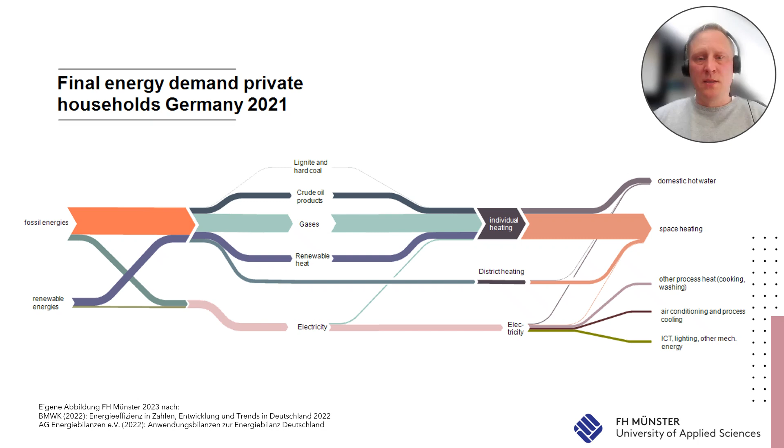But something is changing. For many years now, the heating structure for new residential buildings has been developing in a different direction. Whereas natural gas was the dominant energy source just a few years ago, with a share of well over 50%, in the course of the last few years, and especially in 2022, there has been a clear increase in the use of heat pumps to the disadvantage of natural gas. Within this development, individual solutions are of course depicted, but they also represent the low temperature district heating systems.

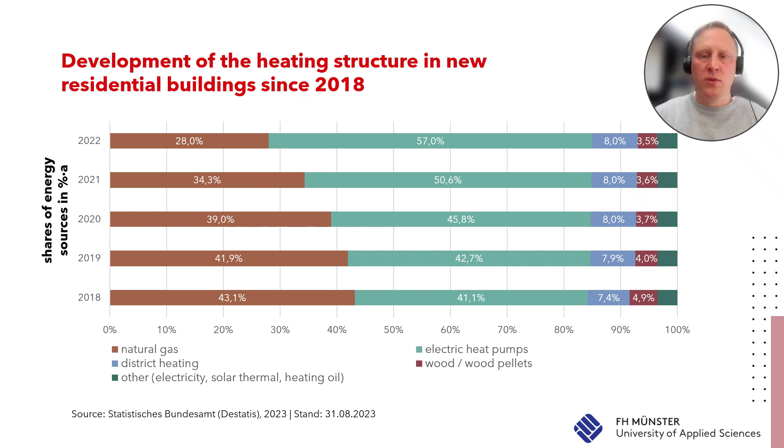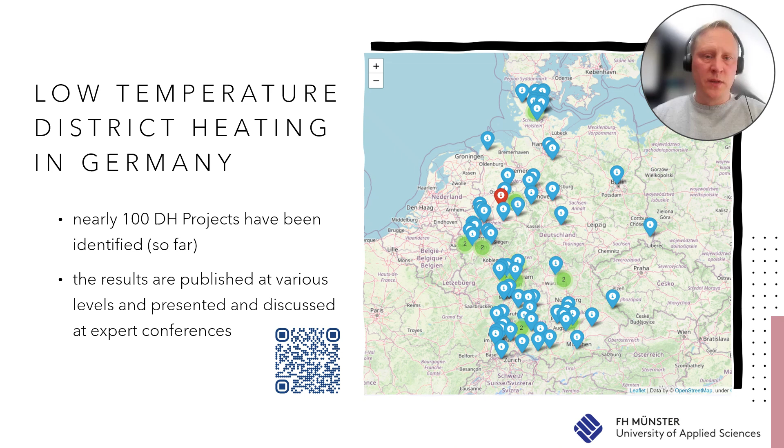More and more utilities and cities are opting for collective solutions, especially in order not to have to give up their customer loyalty. If we look at this map, we see almost 100 low temperature networks in Germany. We created this compilation as part of a funding project in which we are investigating this technology in more detail. I'll talk about that in more depth in a minute.

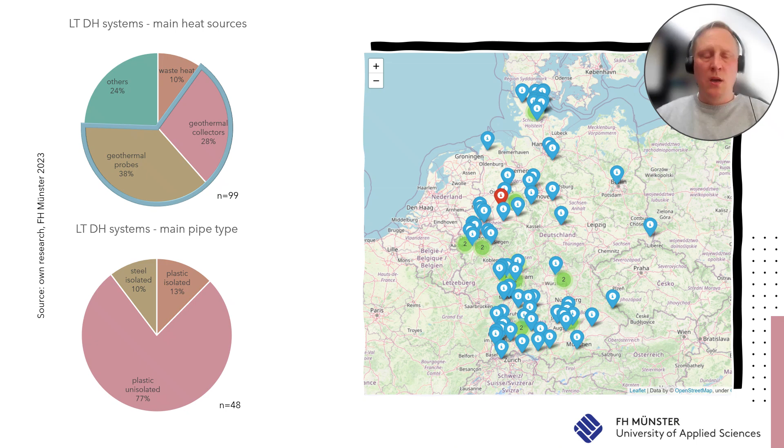The heat source, geothermal energy either obtained via collectors or probes, clearly dominates. On the grid side, this means low flow temperatures. For the end customer, this means a heat pump. In turn, 3/4 of the networks are made of uninsulated plastic. This is also a sign of the low flow temperature, but also of the fact that the ground along the heating network trenches is also used as a heat source. We are therefore no longer talking about heat losses, but about heat gains.

Here you can see the town of Warendorf. The town has a population of almost 38,000 and is located in the north of NRW. The district heating network, which we will take a closer look at in a moment, extends over 18 hectares and includes more than 200 buildings with up to 500 residential units.

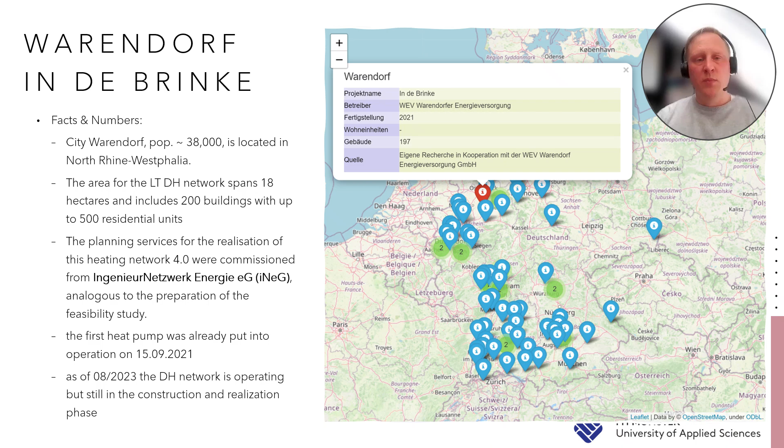The planning services for the realization of this heating network were commissioned from IngenieurNetzwerk Energie eG, iNeG, as well as the feasibility study. The first heat pump was already put into operation in September 2021, and as of August 2023, the district heating network is operating, but still in the construction and realization phase.

In response to the pressing challenges of the heat transition in Germany, as they have been for years and decades, my team already carried out two large Interreg projects from 2016 to 2021 to research alternative heat supply methods. One of these projects led to this particular project in Warendorf.

It all started when the city of Warendorf and its municipal utility decided to no longer supply new housing estates with natural gas. Based on the results of a feasibility study from the aforesaid previous EU-funded project, the construction area In de Brinke became the first test field for this new strategy.

The planning and implementation of the project is funded through the Wärmenetze 4.0 funding program of the Federal Office of Economics and Export Control, BAFA, the predecessor program of the BEW funding you may be aware of. As part of the funding, Stadtwerke Warendorf, in cooperation with us, also applied for funding for the fourth module with the research objective of capacity building, in addition to the funding of planning and construction, and with that task as the only project in Germany.

The task of our research team is to bring the technology of low-temperature district heating networks further into the focus of heat suppliers and thus actively contribute to the reduction of CO2 emissions arising in the heat supply. But let's dive deeper. With the decision to implement a low-temperature district heating network comes a considerable, and for most municipalities, utilities and planners, a new planning complexity.

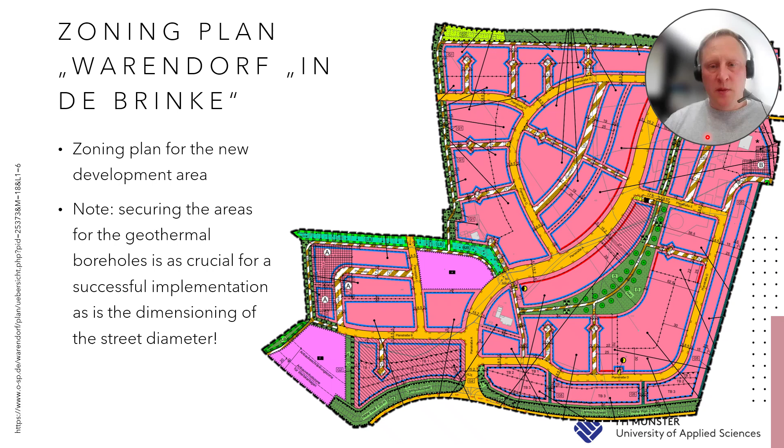Above all, the municipality must take the requirements of the district heating network into account in the development plan. This is mainly done by securing areas for the heating center, the geothermal boreholes, collection and inspection shafts, and of course, the pipelines in the street level. And the city and the politicians have to decide: do I want compulsory connection and use or not?

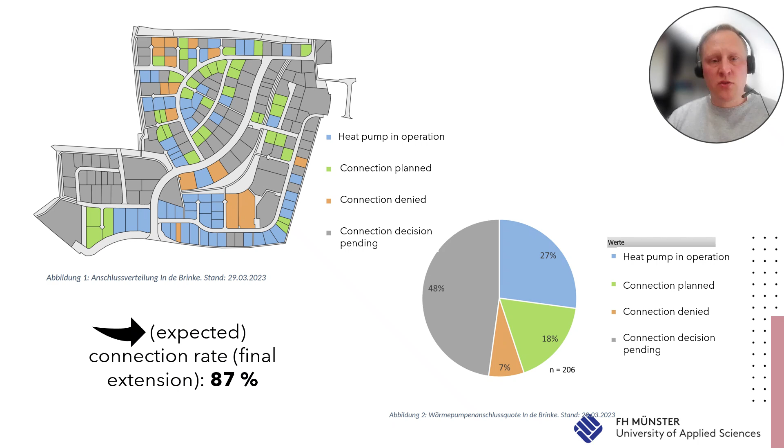The town of Warendorf has decided against it, so now the employee of the public utility company has to go from door to door and advertise the system. Although connection to the grid is included in the purchase contract for the plots of land, connection is not a granted thing. But he is doing very successfully. Of the 206 houses to come, just over 100 have already been completed or are in the process of being completed. And only 7% have decided against the connection so far, so that a connection rate of roughly 90% can be expected at the end of the project.

Let's now take a look at the network itself. Each consumer has a brine heat pump for hot water and heating. This is best operated via renewable energy, of course. As a heat source serve 116 geothermal probes up to 150 meters deep each. And the heat network also serves as a 5-kilometer ditch collector.

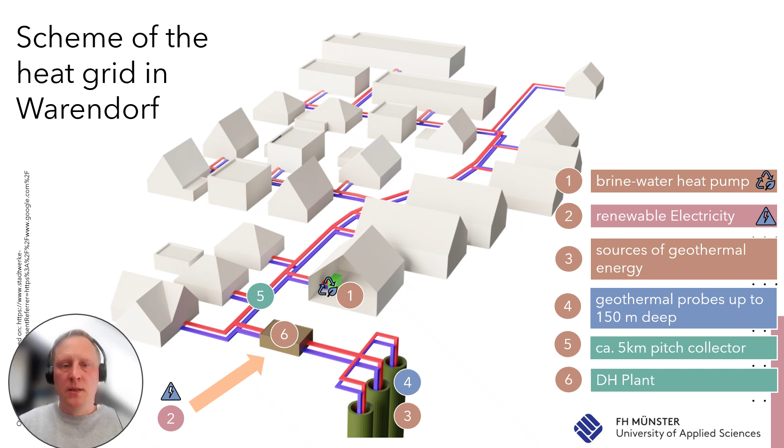And last but not least, the network is controlled via the district heating plant because in addition to the normal operating requirements, each heat pump can be controlled individually in order to optimize network operation. The result is a smart energy system. Now it is high time to come to an end, so let us dare to share prospects for the future.

With this project, Stadtwerke Warendorf has opened up a new field of business, from construction and operating to consulting for other municipal utilities and communities. They are now also exploiting the old town area of Warendorf with the 5th generation district heating system fed by a river heat pump.

In Germany, a number of developments play a decisive role in the future of heating supply. And even if the new construction sector only accounts for a fraction of the energy demand, it still provides important impetus for the business areas of municipal utilities. The following developments can be observed: the mandatory realization of urban heat plans, likely from 2024; the amendment of the Building Energy Act, likely from 2024 as well, with the requirement for 65% renewable energy for new heating systems; the increased customer demands; and of course climate protection targets at various levels.

As an opportunity, as already mentioned, and thus as a driver, new business fields for municipal utilities arise and synergies for sector coupling with local renewable energy resources can be developed. I would like to come to an end now, and I think I have been able to present you with a quick insight into an exciting project against the background of a changing energy landscape in Germany.